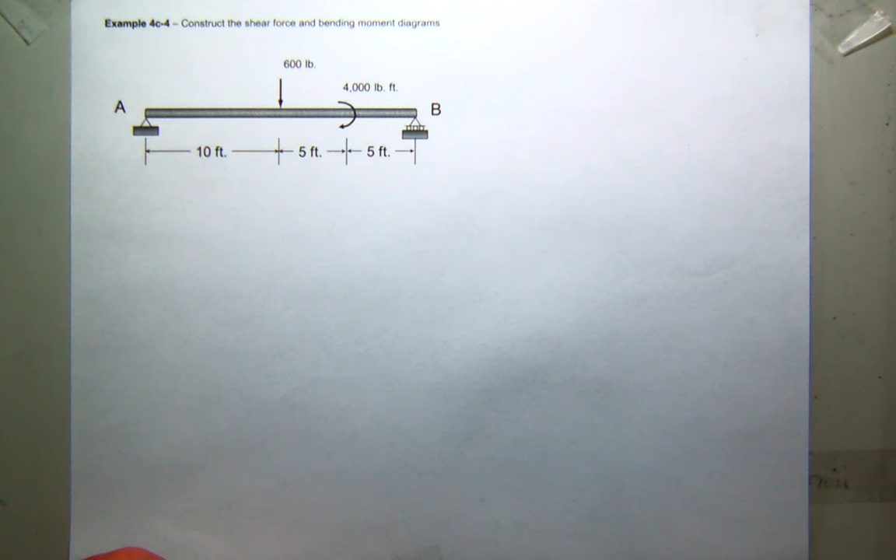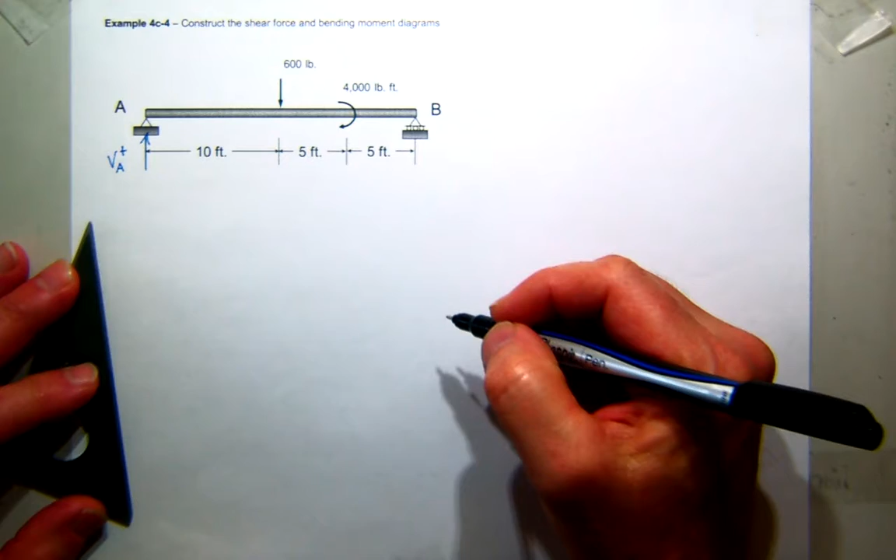The first thing I want to do is find my reactions. I'm going to come over here at A, and assume I have a positive shear at A, and a positive shear at B, drawing both shears in their positive sign convention. And I'm going to find those values.

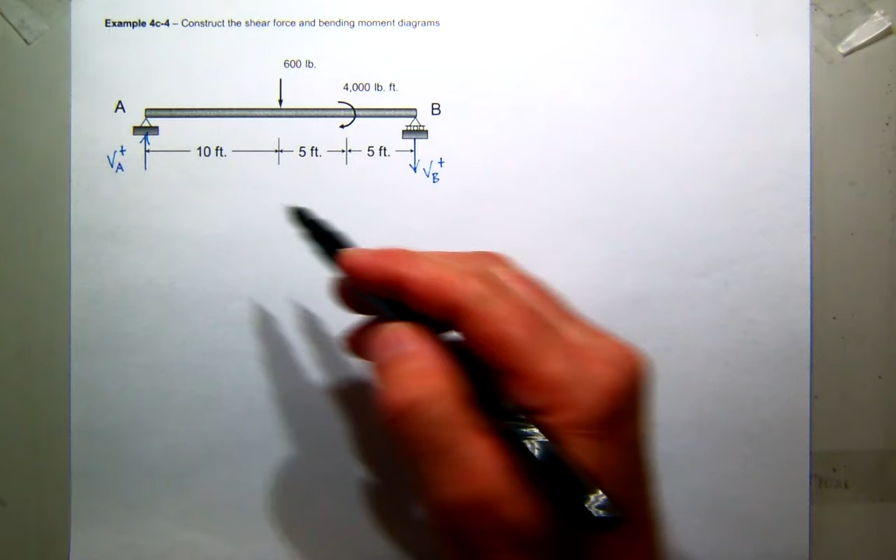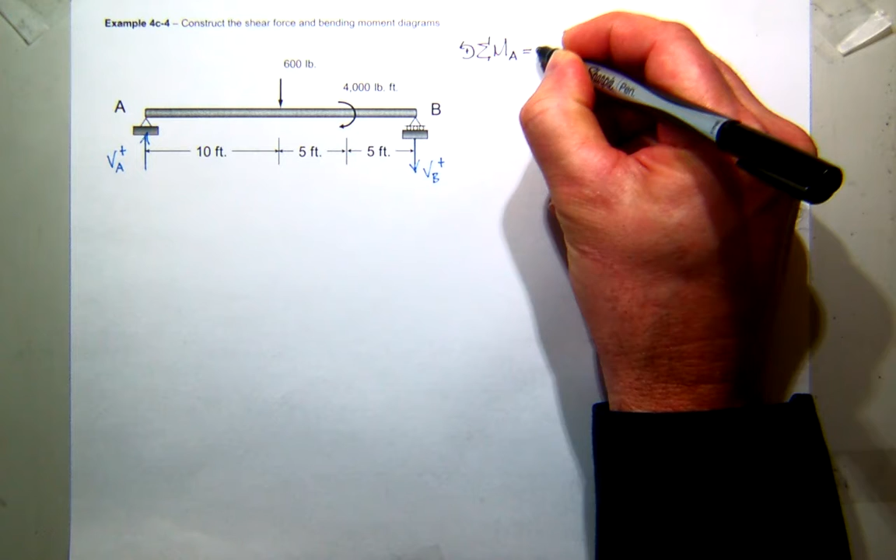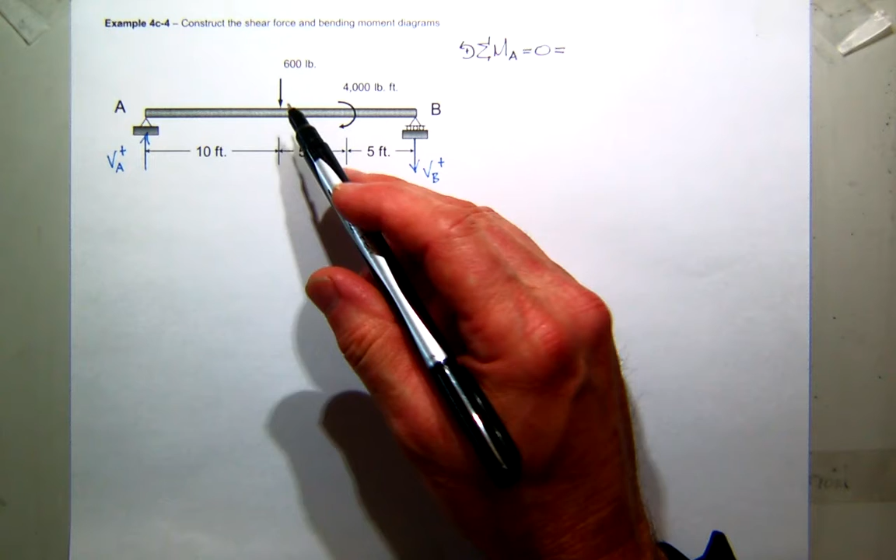There's a lot of different ways to do it. I need to sum moments at probably either A or B. I'll do it at A, alphabetically. So if I sum moments at A and set it equal to 0, I'm looking at the moment produced by this 600-pound force, this applied couple, and this shear force. We'll start with the force. What kind of moment does that create, positive or negative about A? I'm using right-hand rule.

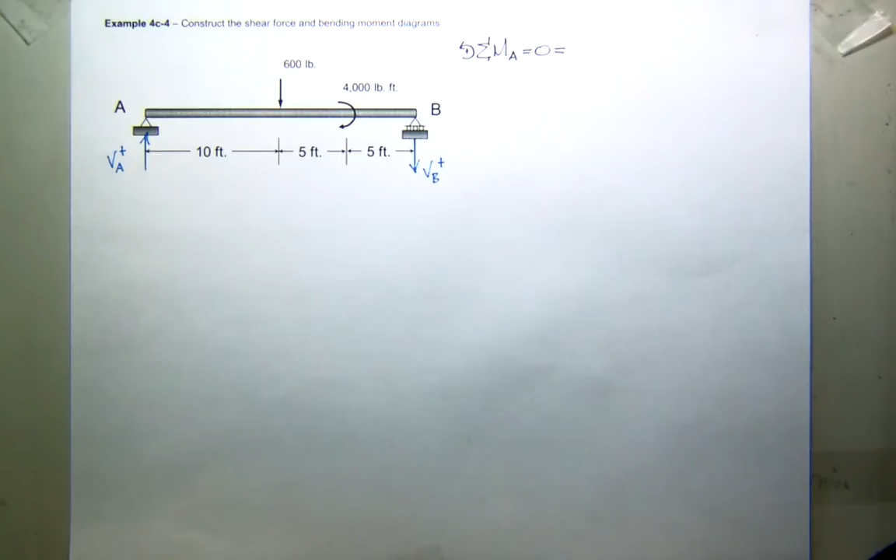Is that better? Looks like it's really shiny. Maybe I'll just turn the light off. Is that better? Oh, I think that looks better, doesn't it? Yeah, okay cool, we'll do it that way.

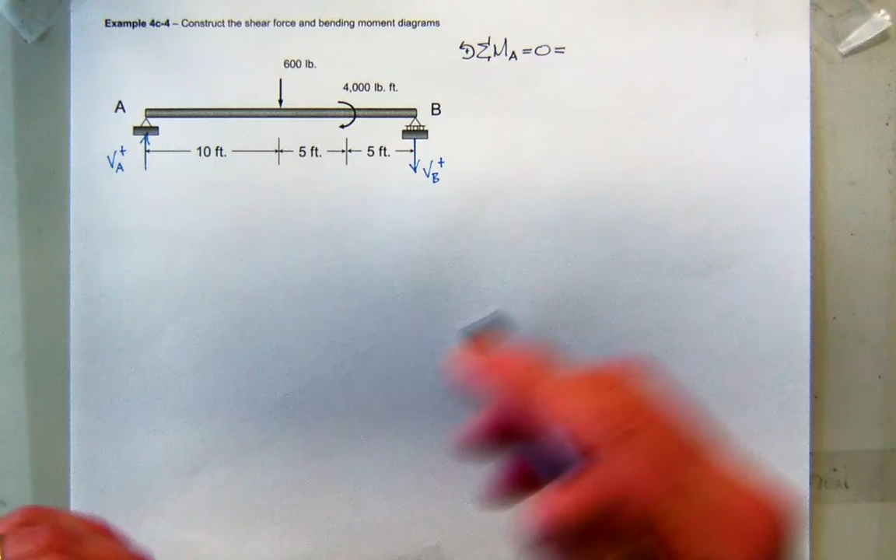All right, so the 600-pound force creates a negative moment, so I'll have 600 pounds, and the moment arm is 10 feet.

I'm summing moments about A, right-hand rule is my sign convention. What kind of moment does this 4,000 produce? Positive or negative? Negative, so that'd be negative 4,000 pound-feet.

And then I have the reaction, the shear at B. What kind of moment does that create? Negative. So the shear at B creates negative moment, and that has a moment arm of 20 feet.

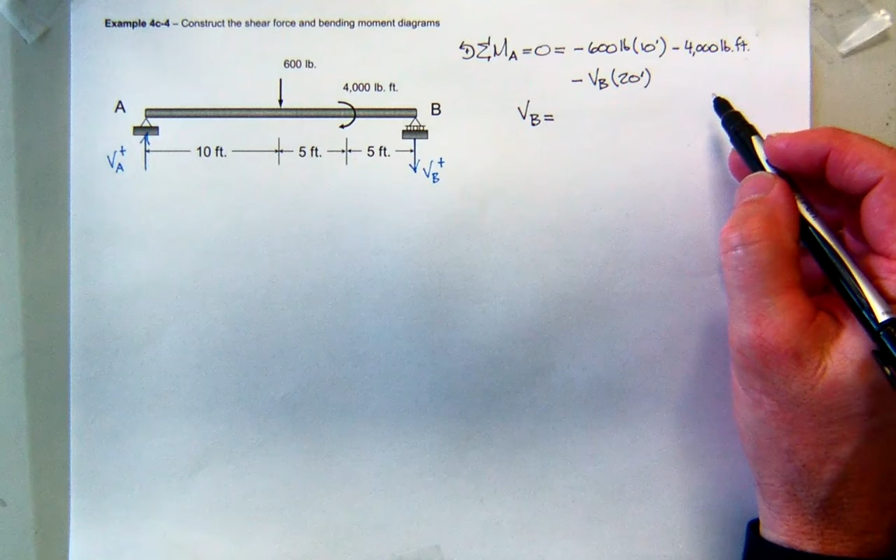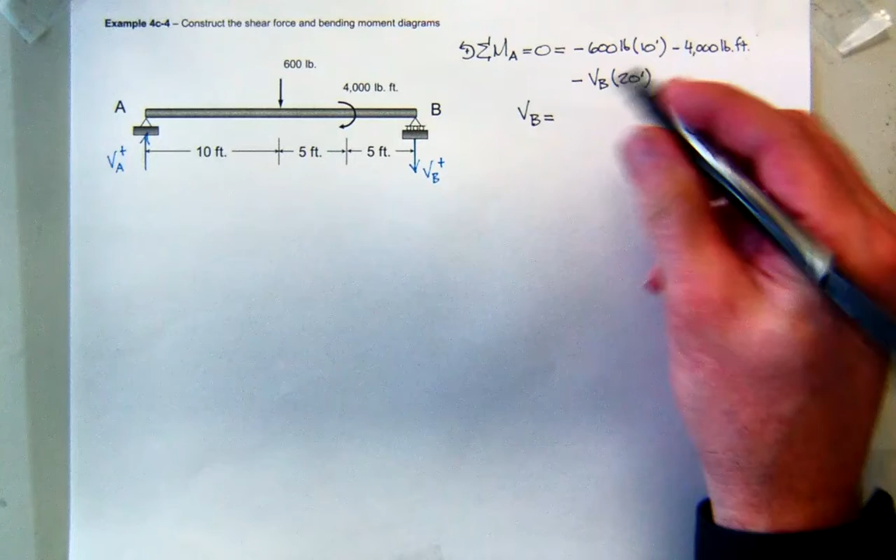So I should be able to solve for the shear at B. I want to say that's going to be, let's see, that's 6,000, that's 10,000... 500? No, negative 500. That sounds reasonable.

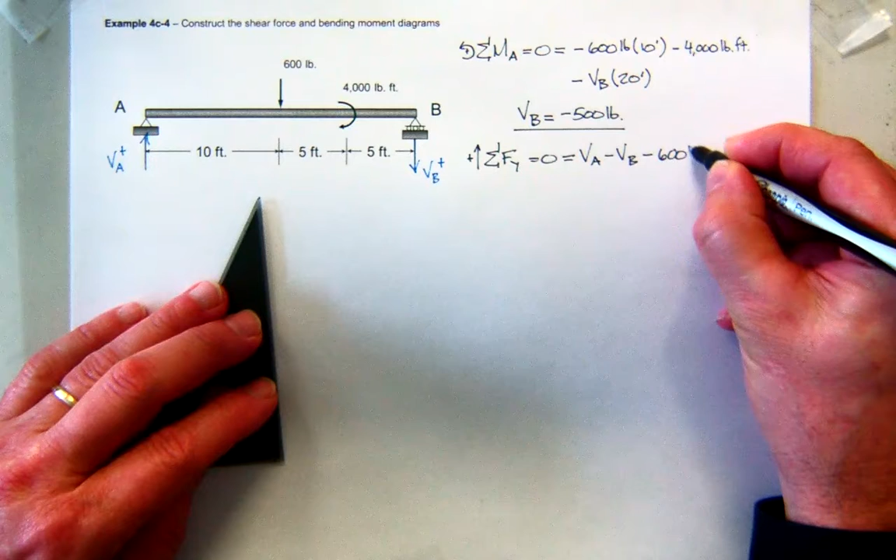So the shear at B is negative. And then if I sum forces in the y direction to make sure that's in equilibrium, what do I have? My shear force at A is up, my shear force at B is down, and I also have acting down a 600-pound force. What else? Nothing. So I'll solve now for the shear at A.

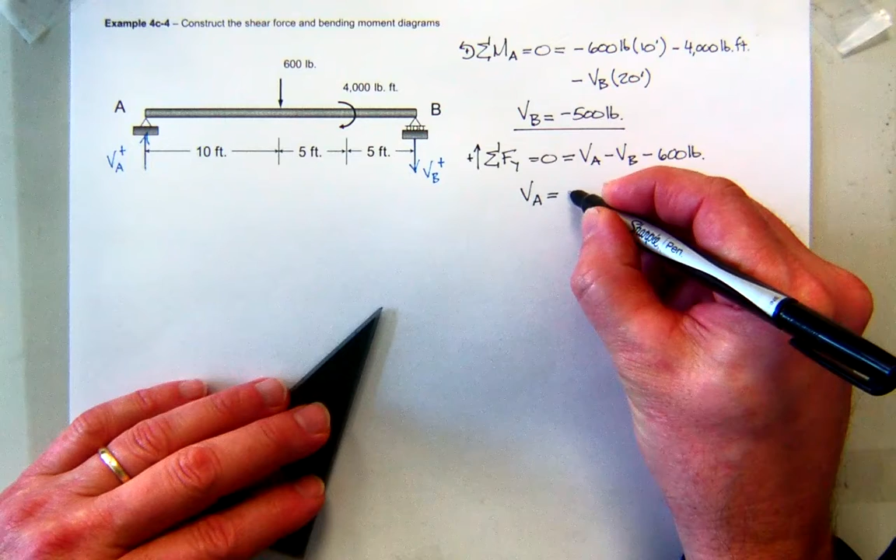So I plug in my 500 here, the signs cancel, and it ends up looking like I get 100. Does that look right? And that comes out to be positive shear. I found my shear reactions.

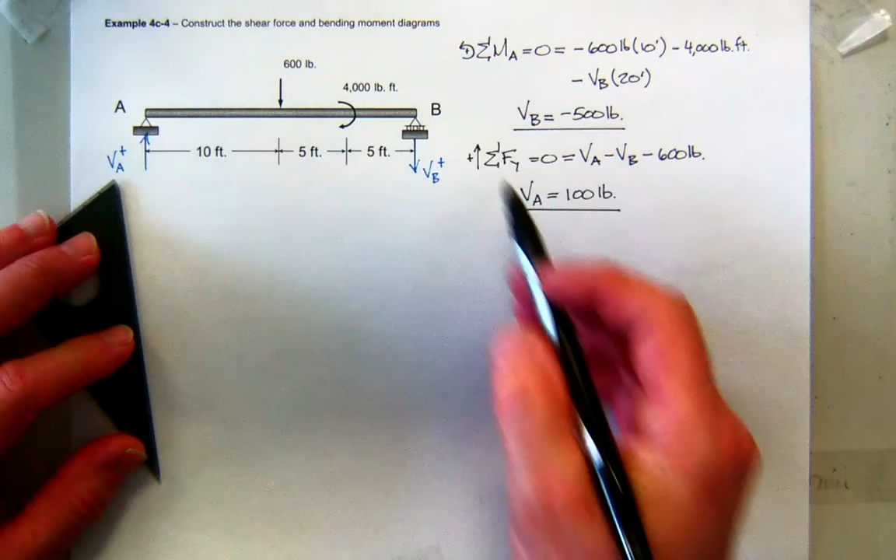So I'm going to come over here to my structure and sketch a template. There's my left side, there's my right side, so there's the boundary of my problem. I'll go ahead and for my shear force add a positive x value. I'll assume my shear is up here, and all my units are going to be in pounds. Also, I'll notice there's an applied load here, that's probably going to be an interesting point, so I'll add that to my template. Also, I've got an applied moment, that might affect something too down the road, so I'll add that to my template. So that's a good starting spot.

Remember, the first thing we do is put on our shear value. So starting on the left-hand side, looking at the shear at A, I have a value of 100. When I get to the right-hand side, my shear at B, what should my value be? Negative 500.

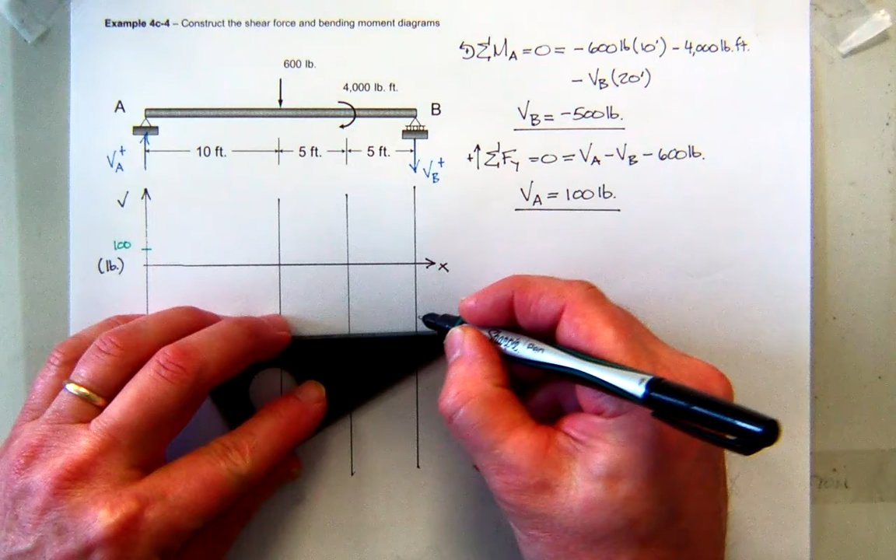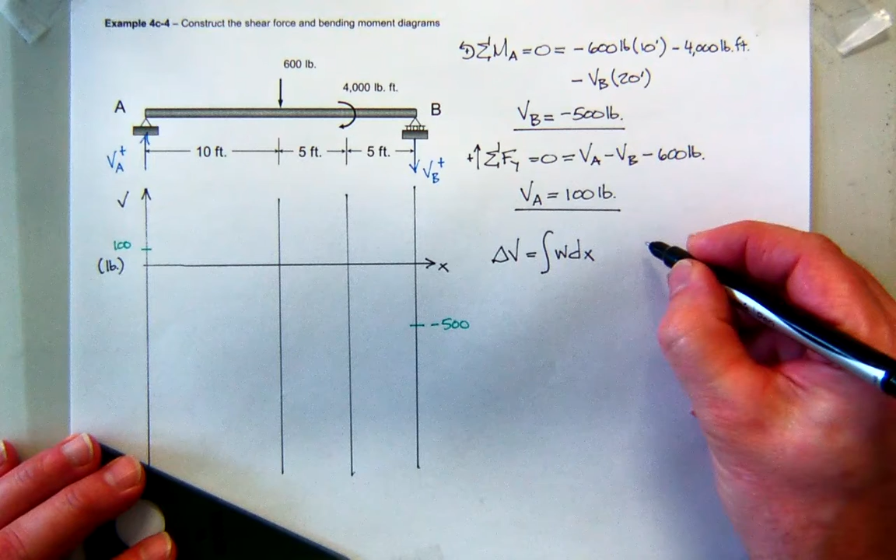Again, I have my starting spot and my ending spot. Also, I've got my relationships. I know that the change in shear between any two points is the area under that portion of the load curve. And then also that the slope of my shear diagram is equal to the value of the load.

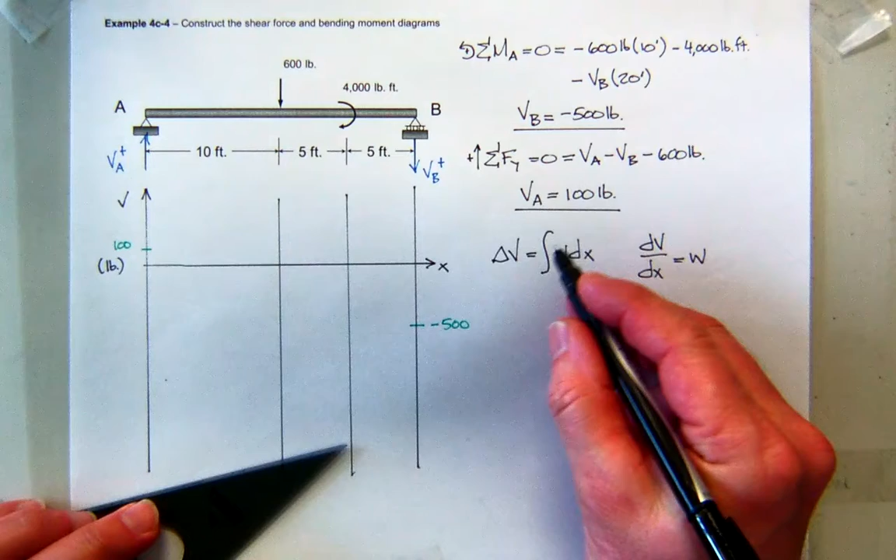So let's take this one first and apply it. Now remember, this point load, I know what's going to happen at the point load - my shear is going to change instantaneously that amount. So let's look at the section right before it, just to the left. What's the load just to the left? If you were to kind of cover that up, what do you see here? Nothing. Load is 0. So the area under 0 is 0. So I should, if I start at 100, I should stop at 100.

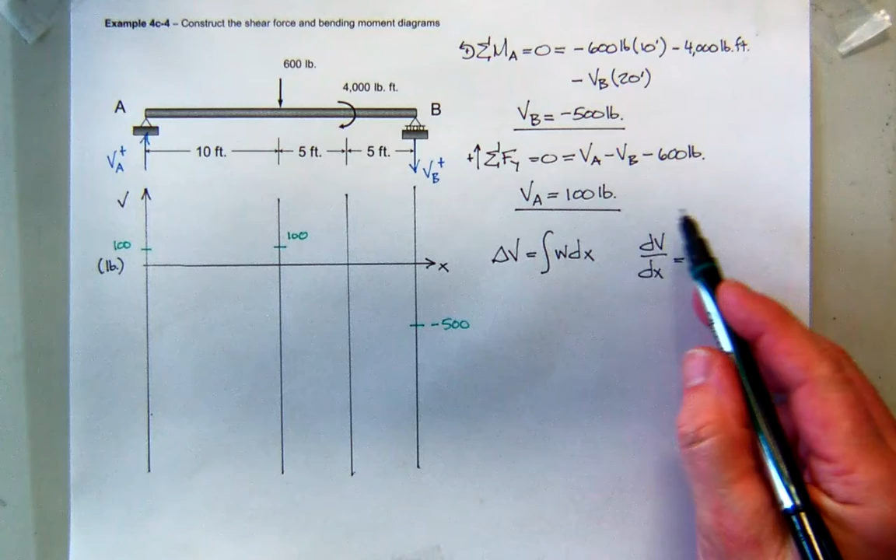And then the slope of the shear diagram is equal to the load, and just as we mentioned before, the load is 0, so I have a 0 slope. 0 slope is a horizontal line. So it looks like the shear over the first 10 feet is constant and equal to 100.

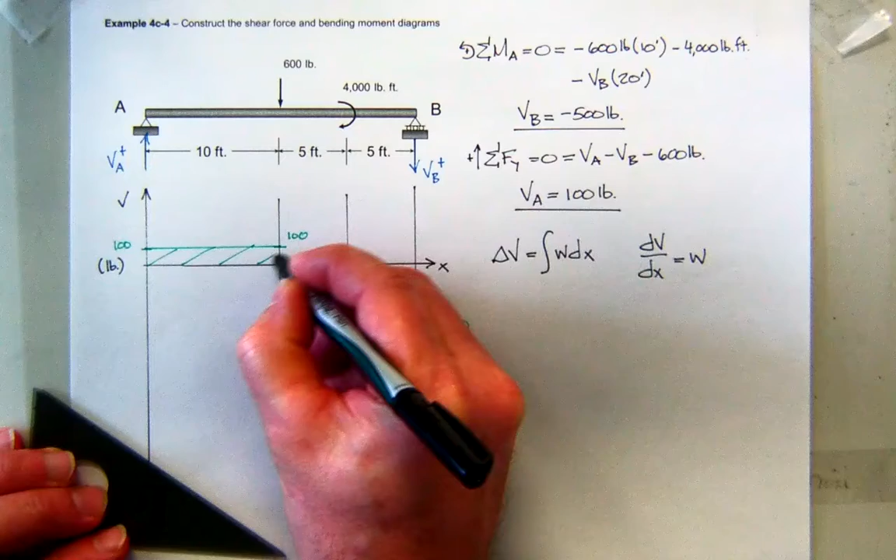Now as I go from the left to the right side of this point load, what happens? The shear changes exactly how much? 600, and it's down, so that's negative. So 100 minus 600 is minus 500.

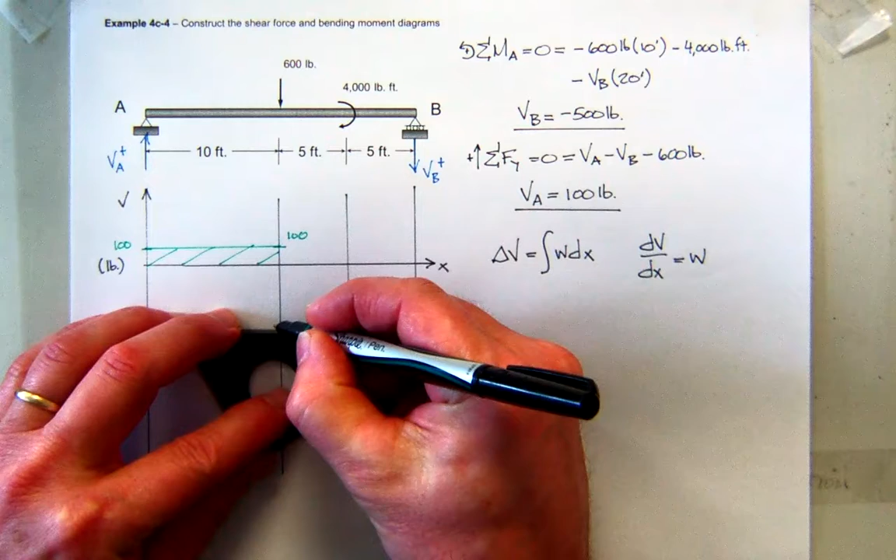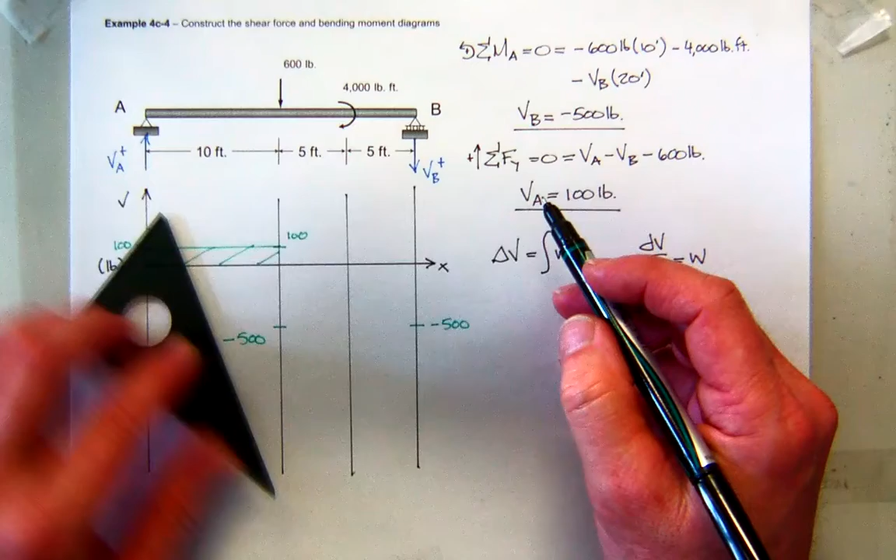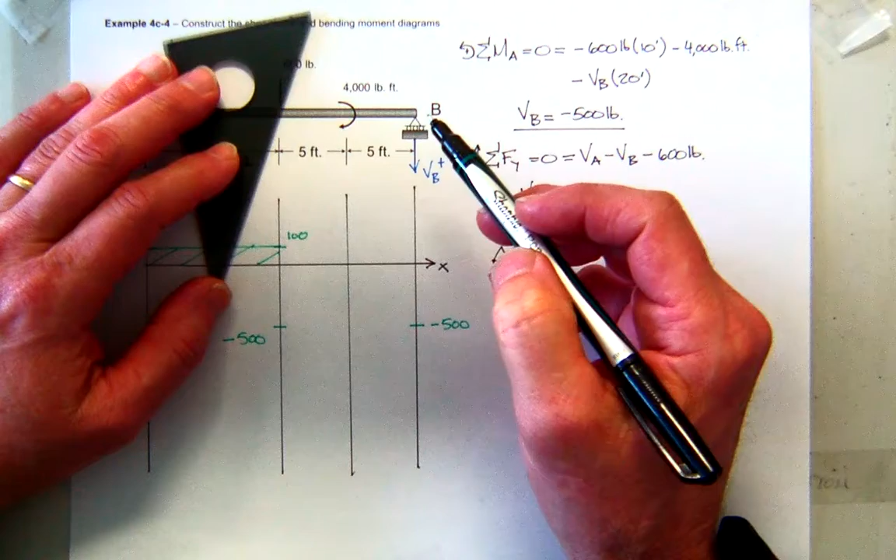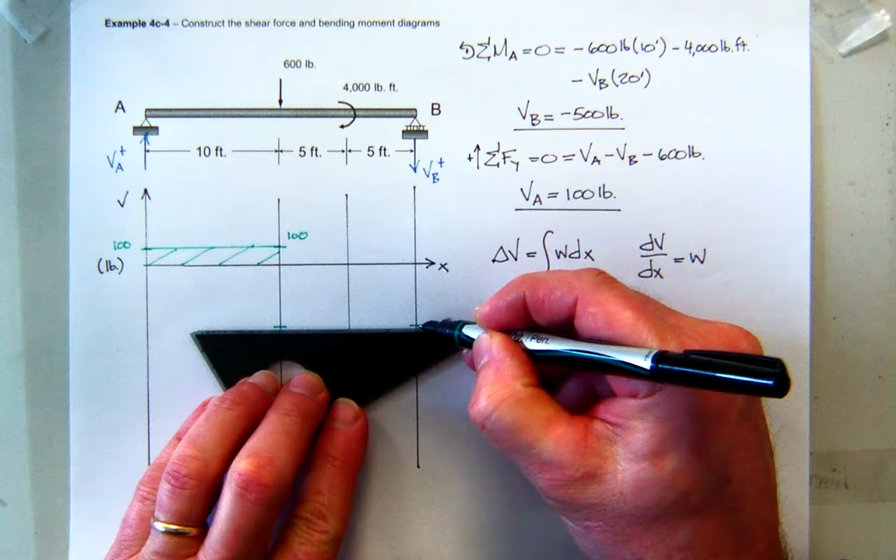Now the change in shear between these two points should be the area under the load curve. What's the force load between the midpoint and B? Don't be distracted by this moment - moment is not a force. So there is none, meaning no change. If you start at negative 500, you end at negative 500, it matches. The slope of that curve equals the load, which is 0, so we have 0 slope. So there's your shear diagram.

So what's the maximum shear and where does it occur? Maximum shear is negative 500 and occurs anywhere in the second half of the beam. Any questions about that one?

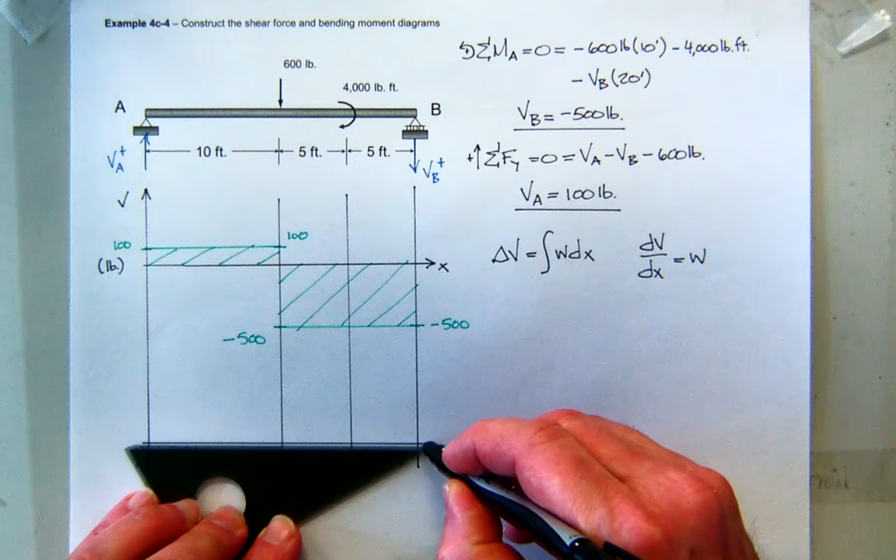So let's add to that - let's do our moment diagram. I'll apply, there's my x direction, there's my positive moment. All these values will be in pound feet. What's our starting point here? To go up to A, what's the moment at A? 0.

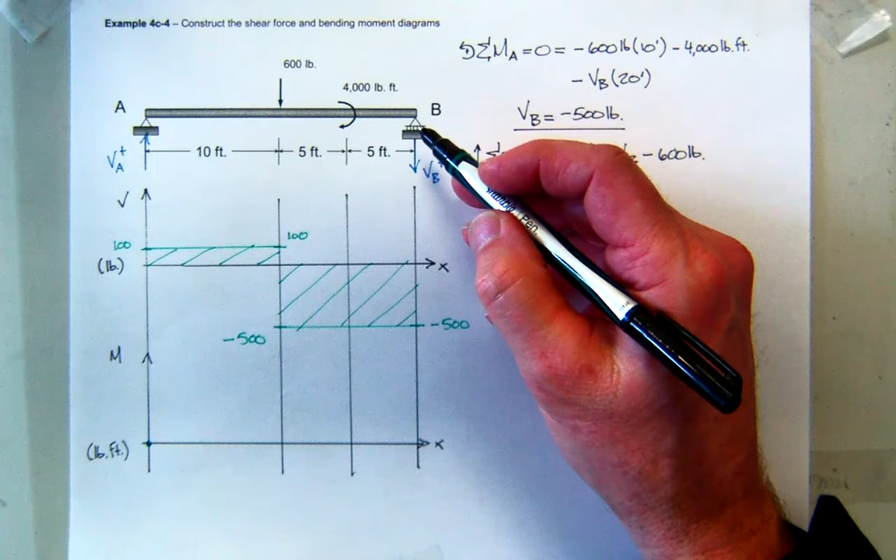Over here at the end point, do we know something about the moment? Well, yes, since there's no cantilever section, we know that this moment is also 0. So we know where we're going to start and end. Now we're going to apply the relationship that the change in moment equals the area of the shear diagram. Look at our shear diagram - nice rectangular areas, shouldn't be too big of a problem. Also, the slope of our moment diagram should equal the value of the shear.

Applying this relationship, there's a nice chunk of shear I can deal with here. Let's just worry about this first 10 feet. What is the area under the shear diagram over this first 10 feet? Well, rectangle - base times height, so 10 feet times 100 pounds is 1,000. I'll end up with a value of 1,000. I won't write it in just yet. What's the slope of that diagram? It's equal to the shear. What's the shear everywhere? Constant and positive, so it looks something like that - this would have a value of 1,000.

Now what happens next? I move over here and start looking at this area. Now there's one other thing we've got to pay attention to - we've got an applied moment. So let's just worry about this first part up to the applied moment, which is 5 feet. I'll double hatch this one to make it stand out. So what's this part of the curve? Again, base times height, so 5 times negative 500, that's negative 2,500. If I start at 1,000 and subtract 2,500, what do I get? Negative 1,500. And what's the slope between that point?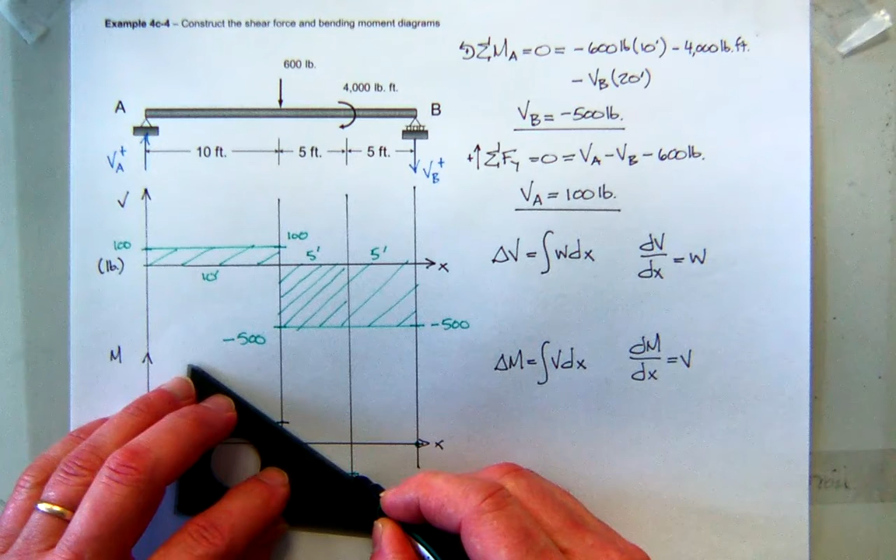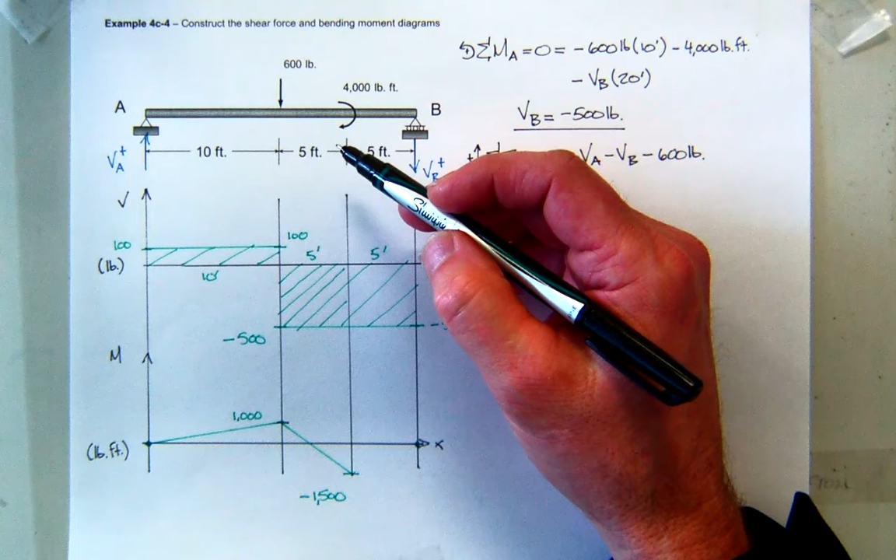Well, according to our relationship, it's the value of the shear, which is constant and negative. So here's a constant negative slope. Now what happens? As I go from the left side to the right side, my moment equation changes based upon this slope, and a clockwise applied moment creates a positive jump. So I'm going to add 4,000 to the negative 1,500 and get 2,500.

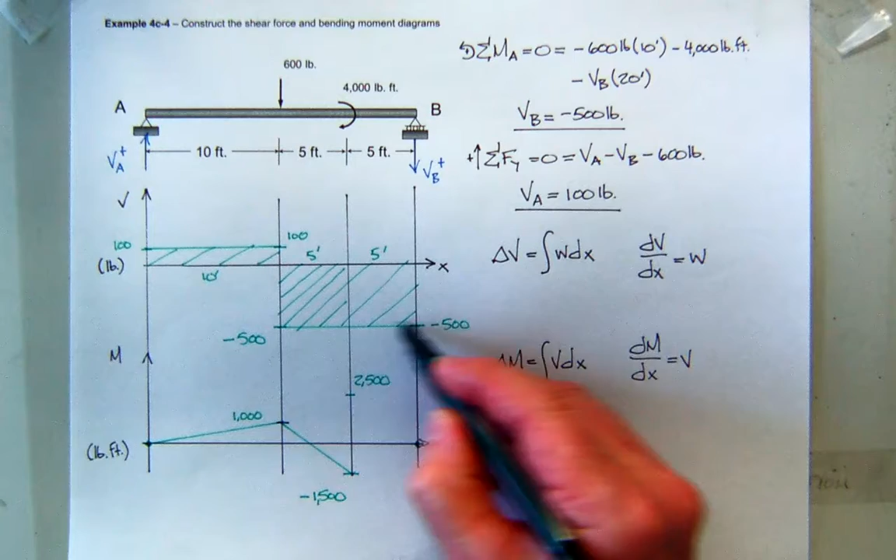Now the change in moment over the last 5 feet, from 2,500 to 0 - I know it better come out to be 0, so let's see. That part of the curve, again a rectangular section, base of 5, height of negative 500, that's negative 2,500. Well that's great - I'm starting at 2,500, subtract 2,500, I get 0. Everything matches. Then the slope equals the shear, which is constant and negative, so I get a constant negative value. So there's my moment diagram.

So in this particular problem, what is the maximum bending moment in the beam? Looks like it's positive 2,500, occurring just to the right of the applied couple. There's actually a point in the beam where the moment is 0 - that's a transition from a positive moment. What shape would the curve of the beam bend into with a positive moment? Kind of a smiley face, then into a negative, then back into a positive. So this thing is going to do all kinds of twisting as we go along, because of this moment.

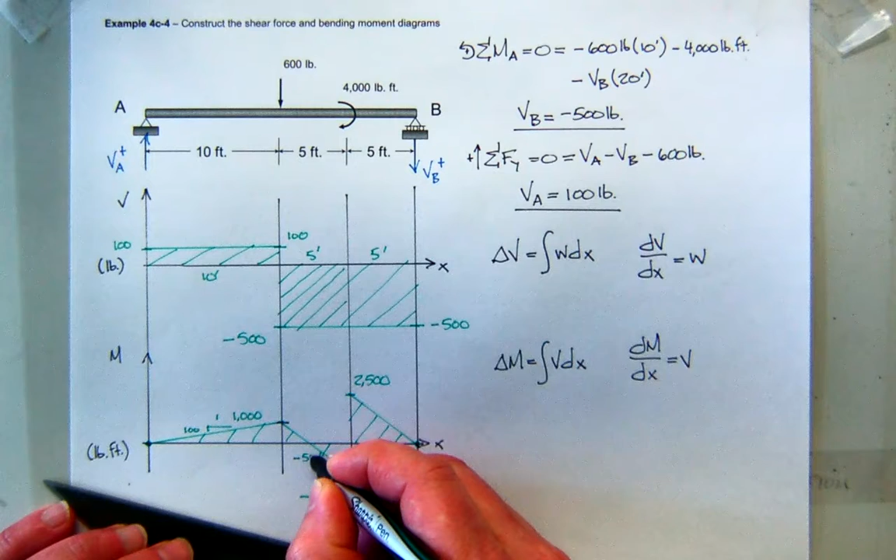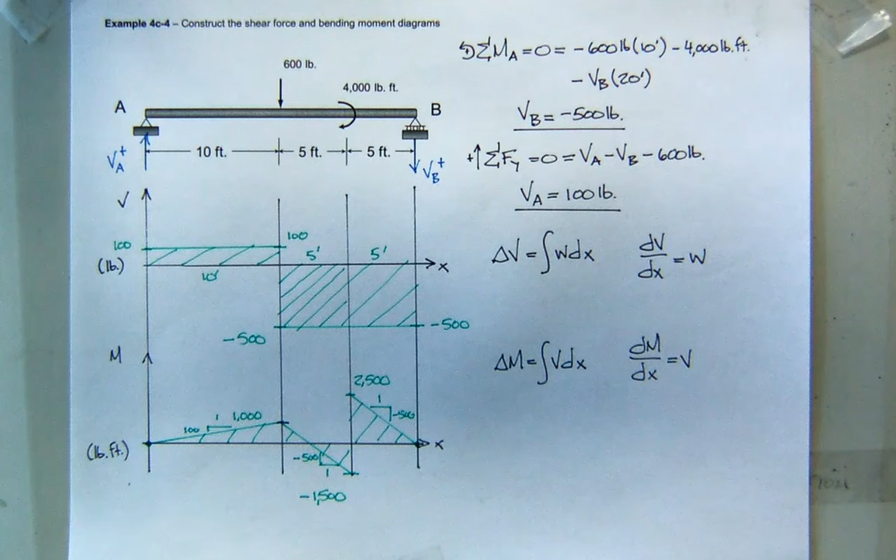Just so it might help you - or it may not - I'll write here that the slope is, obviously this is not to scale, it's 100 to 1. The slope here is minus 500 to 1, and here, minus 500 to 1. Any questions about that? That's a testable problem, I think.